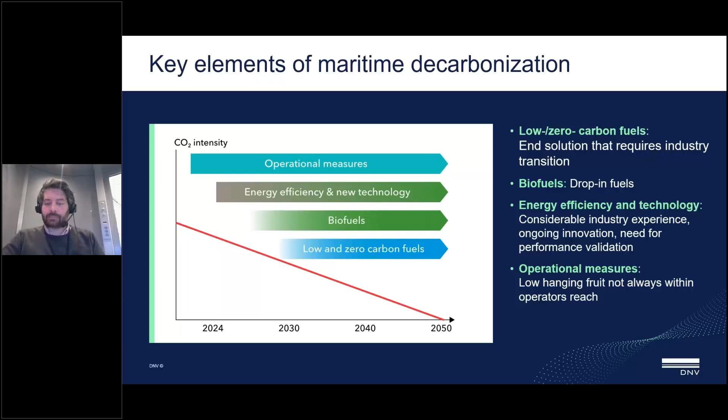So starting from the fuels, what we see here, if we start from the left-hand side with the pie charts, in the top left-hand side, we have the uptake of alternative fuels. In the existing fleet, more than 8% is able to burn some alternative fuel. We don't talk about fuel-ready vessels, we talk about fuel-capable vessels. And 8% is a lot, but not big enough. So it will become bigger in the future.

If you see at the bottom left, more than half of the existing order book is going to be capable to burn alternative fuels. So we expect the uptake and the theoretical demand to increase. So this is one aspect of the story.

If we take a second one, we go to the supply. We will have some part of the fleet being able to burn those fuels, but will they be available? On that front, we see a lot of activity, many projects being discussed and agreed. We have our AFI database that gives a good forecast on where this is heading. But the big challenge is how much of these fuels will be available for marine usage, both in terms of geographical availability and cost.

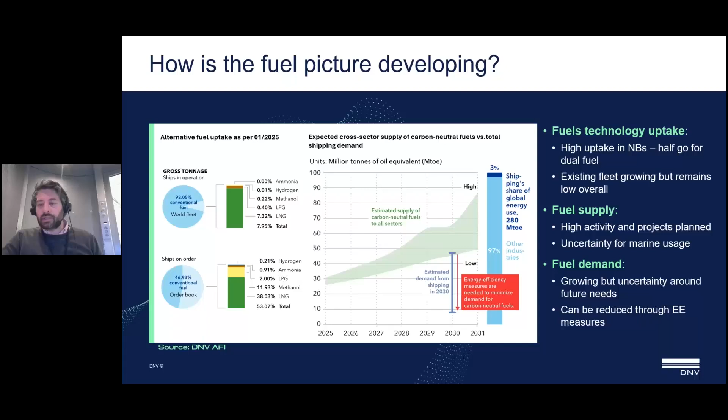The last aspect of this story is the actual fuel demand. So we have the theoretical capacity, the uptake, how much the fleet can burn. We have the supply, how much fuel is available, and then we have how much fuel is actually burned. This amount has been growing, but it remains quite uncertain for the future. The definite fact is that we can reduce that by utilizing energy efficiency measures, and this can help in the long term.

So this leads us to the question, why is energy efficiency important and how can it help? It can help in multiple ways. In the short term, it helps with reducing consumption, which relates to costs, both fuel costs and emission costs, since now we face CO2 taxes, and can help with compliance, either directly or indirectly. But this is the short term.

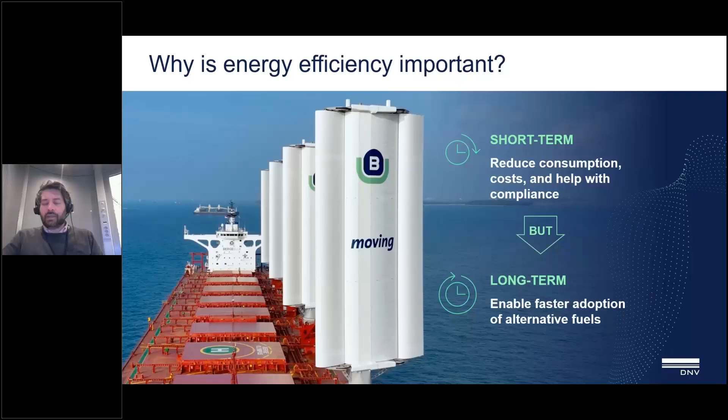If we take the long term and a more futuristic approach, we see that energy efficiency can be a great enabler of faster adoption of alternative fuels. How? We have two main arguments to substantiate that.

One comes from our maritime forecast studies, where we estimated a potential improvement through energy efficiency for the global fleet of 16%. This is quite a big number, but to bring some context into it, it is the same amount of emissions that would be emitted from the 2,500 largest ships of the global fleet, or 55,000 of the smallest ships, which are both quite big numbers and show how much potential energy efficiency has.

Of course, not the entirety of this 16% can be achieved, especially due to not having a good business case and techno-economic results. But the interesting part is that all of this 16% can, in theory and technically, be achieved with today's technology. So it's not something that requires new infrastructure, new technologies, or new on-land production facilities - we can utilize it today.

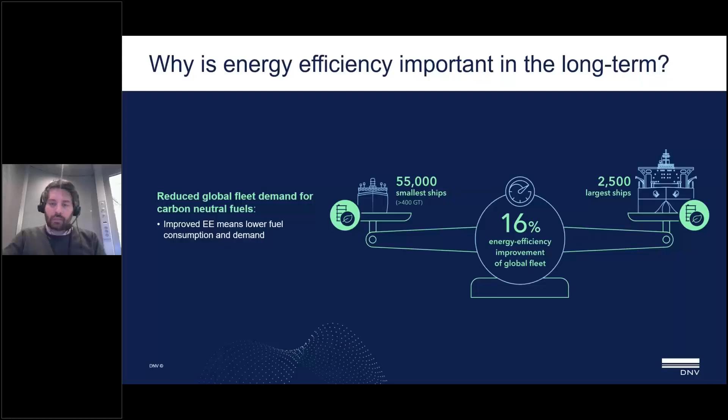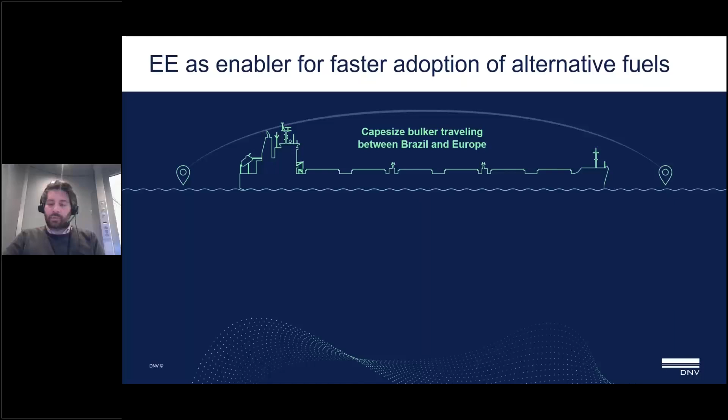But of course, it does not always make financial sense. But then we have another example. If we take this Cape-size bulk carrier traveling between Brazil and Europe, today she would burn 600 tons for this one voyage, paying...

$300,000. If we now take a theoretical increase of energy efficiency by 20%, that would mean that for each voyage we could save $60,000, which is quite a good payback and can provide positive business cases for quite a few vessels.

But in the future, we cannot necessarily predict the fuel of the future, but we can say with quite high confidence that it will be more expensive. In this reality, the savings from each trip multiply, and in this case, it could reach up to $300,000.

And this can make the business case quite different in both ways - both for adopting energy efficiency more easily, but also, if you adopt energy efficiency, you can then adopt the new fuels more easily because it will reduce the cost, which is one of the biggest challenges with new fuels. This amount does not even include the savings from emissions cost decreases through achieving compliance.

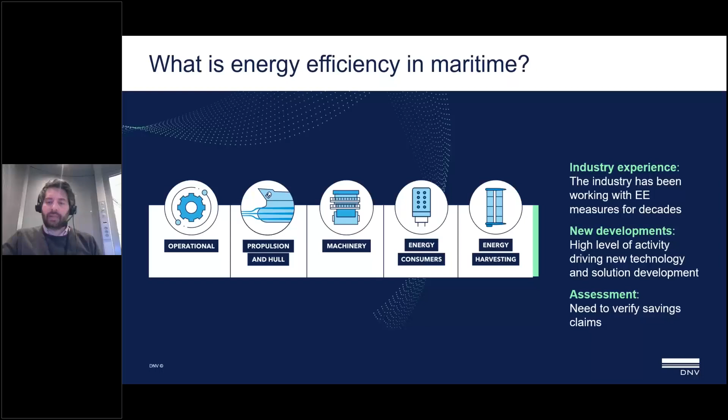This is also reflected in the uptake. We have some high-level statistics here on the uptake of the technologies. We shouldn't fixate on the numbers, since they're hard to estimate in any case, but I'd like to focus on the trends. The first key takeaway for me from this table is that you have a lot of greens and a lot of reds. So there are technologies and ship types with very low uptake of energy efficiency measures, which means they have a lot of potential.

Then you have other segments like container ships, for example, that have done a lot of retrofitting and installation on new buildings, and have high uptake. But even in the greenest parts, the percentages are quite low. This shows that as an industry we still have a lot of potential.

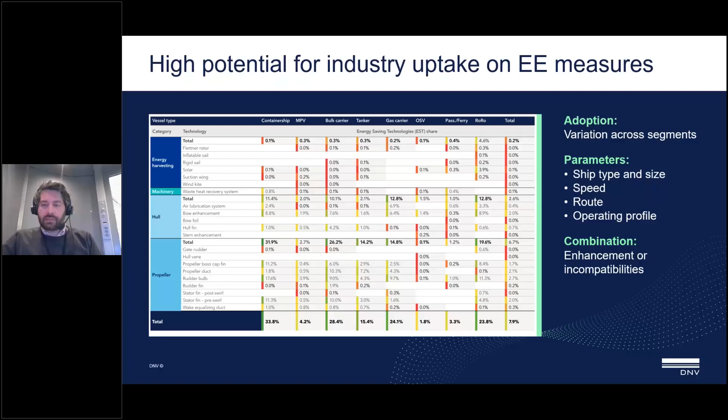But of course it doesn't always make sense to go for the retrofitting route. You need to assess on a case-by-case, vessel-specific basis, taking into account all the parameters, in order to assess the feasibility of the retrofit.

In this report we published, we monitored all the available technologies, more than 40 measures, and you can find a table with a high-level presentation of all the technologies, providing information on metrics including efficiency gains, costs, and implementation time.

Then information on the impact, on which schemes this technology can be used for, EEDI or only operational measures like CII or FuelEU, and then a very high-level applicability to ship types.

Of course this can vary significantly within one segment. You have various sizes of tankers, and even within the same size you have various operating conditions, but this provides a good overview of where you should focus.

Now, if you want to focus on one technology, in the report for each technology we have one or two pages that provide information on the main challenges, the main dimensions, class requirements, milestone projects, industry experience, and also a ribbon that lets you easily guide yourself through the suitability of this measure for specific vessels.

This ribbon covers the TRL, the technology readiness level of the measure, and at the bottom you have the ship type and vessel size suitability for each type, based on our experts' judgment, taking into account technical, operational, commercial, and techno-economic aspects.

Then you may get information on vessel age applicability. It may be that the older the vessel gets, the less promising this technology becomes, typically from a techno-economic point of view, and whether it's a good option to retrofit or only suitable for new building installation.

Then, which schemes does this have an impact on: EEXI, EEDI, CII, ETS, and FuelEU or GFI, with a disclaimer that we don't know for certain, but based on the latest drafts of how the GFI could look.

And in the last column you may find high-level information around CAPEX, efficiency gains, OPEX, and also implementation information. As I said, this is quite high level. For more details, please get in contact with us, our experts, and your local point of contact for more information on specific vessels and routes.

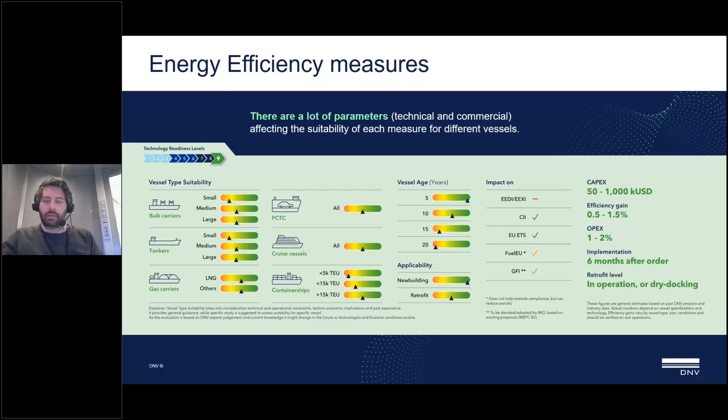Now trying to go through the main categories of the energy efficiency technology, we have propulsion and hull measures. We have 4 aspects that we judge each category: technology, regulatory acceptance, efficiency gains, and economics.

When it comes to technology, this category of measures is quite mature, however we see quite many new technologies being developed every month. Regulatory acceptance is quite high and relatively easy. They can provide efficiency gains across the whole spectrum from low to high. The higher you go, the bigger and more time-consuming installations you need, but also the higher the investment cost. And when it comes to economics, we typically have low returns on investment.

The 3 most popular measures in this category are propeller retrofit, typically mainly done for container ships, but it can provide quite a lot of savings. Low friction coating, I think that's one of the most popular solutions overall, and in the past year it has been boosted quite significantly. And propeller flow improvements that can be retrofitted quite easily—some of them don't even require dry dock.

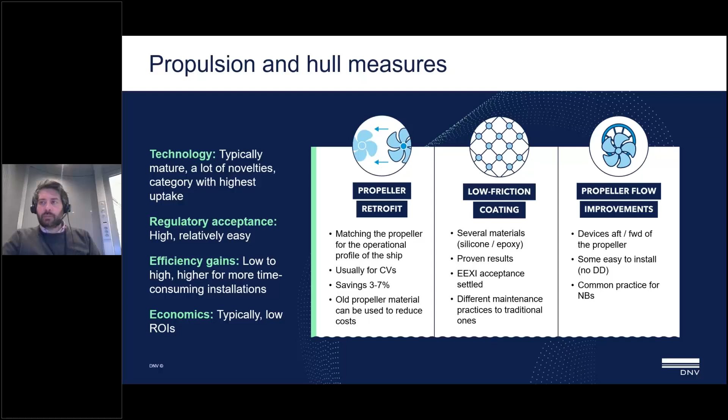Then we have machinery measures. They are quite mature. The interesting thing here is that we see old technologies that did not make sense for financial, techno-economical reasons—now they do make sense, so they come back. There is high regulatory acceptance, and the efficiency gains can be low to medium typically, which leads to higher ROIs. The most popular solutions are shaft generators, which have also become a standard in new buildings, waste heat recovery—both high temperature and ORC, though they can be a costly retrofit—and finally auxiliary engine economizers, a very common choice for new buildings.

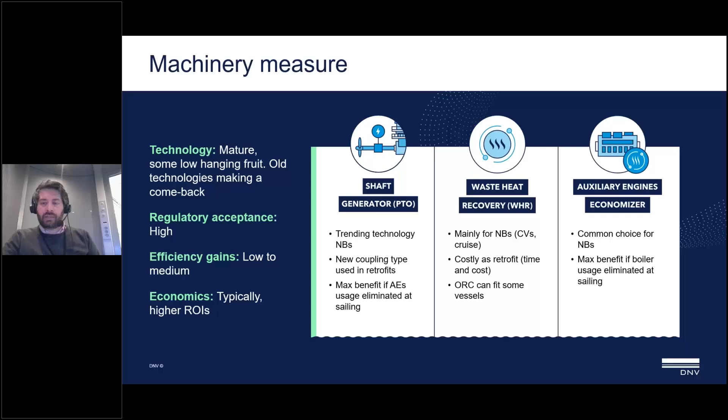Then we have the more exotic, new stuff: energy harvesting. These are quite novel technologies that need to be proven. Definitely when it comes to regulatory acceptance, especially wind-assisted propulsion,

they have this reward that FuelEU provides, the 5%, and there are discussions that IMO will add something similar, so it's quite good on the regulatory aspect. When it comes to efficiency gains, they are quite ship-specific and actually route-specific. Especially for wind, the gains and the business case of installing any type of WAPs is heavily connected with the weather profile of the route of the vessel. So automatically this excludes a large part of the fleet, but if it can be predicted for specific routes, then there are quite high gains that can be achieved. And definitely they are quite costly exercises, at least for now—the capex is quite high, but of course the more we move into a volume business, we expect the cost to reduce significantly.

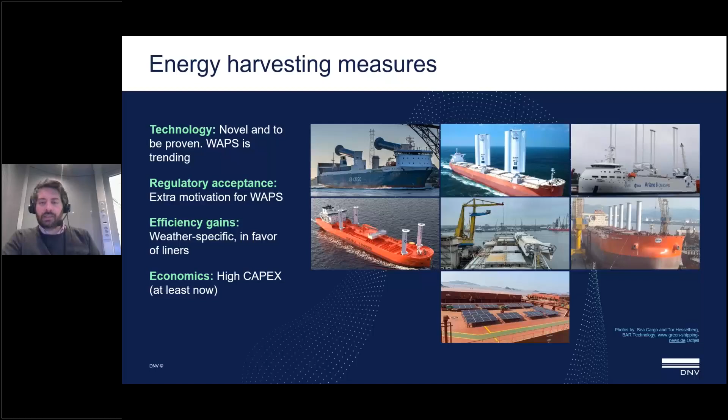Last but not least, we have the operational measures. They are mature, but the challenge here is that it's not always within the control of the operator, the owner, or the manager. They are de facto accepted by the regulations because they have an impact on actual consumption, and they can provide up to moderate efficiency gains. The most popular ones being discussed are just-in-time arrival, which also needs the cooperation of other stakeholders, hull cleaning, and autopilot.

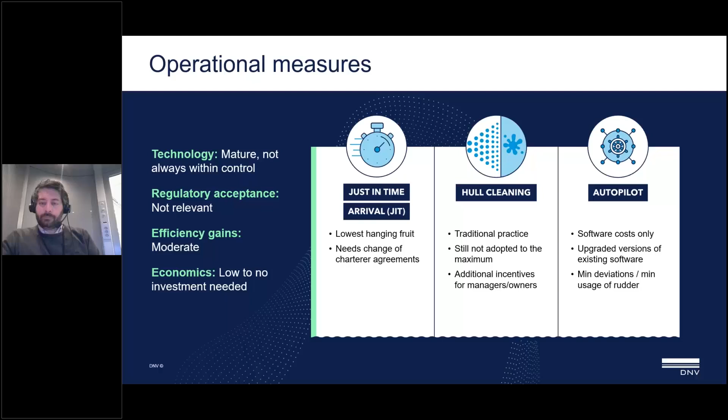So we have a few examples. If a vessel is about to install an ALS, air lubrication system, then of course there are synergies with a shaft generator—being able to produce the extra power needed with better efficiency creates a very good synergy. But on the other hand, this could limit the impact of the ALS if you have a dead weight increase, because it may affect the efficiency of the whole system.

And similarly, if you have high performance coating, then you will not get the savings of both, because inherently the ALS provides better anti-fouling capabilities.

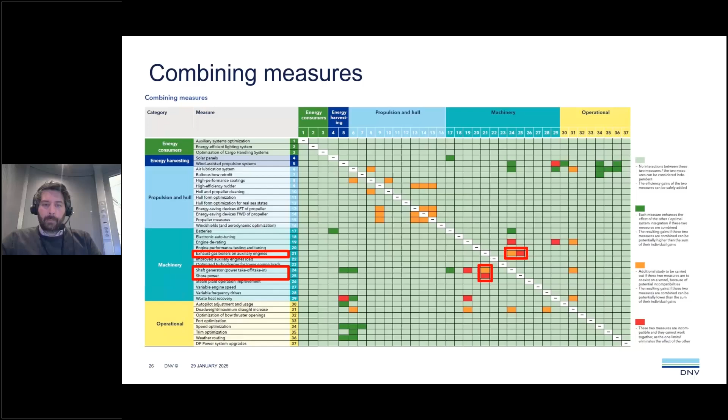So focusing on a few selected technologies now, we have energy efficiency lighting systems. They are quite an easy retrofit. It can be high cost for some vessels, but also high reward. For cargo vessels, it may not have that big of an impact, but for other ship types like cruise vessels, ROPAX and PCTCs, it can be quite rewarding and impactful.

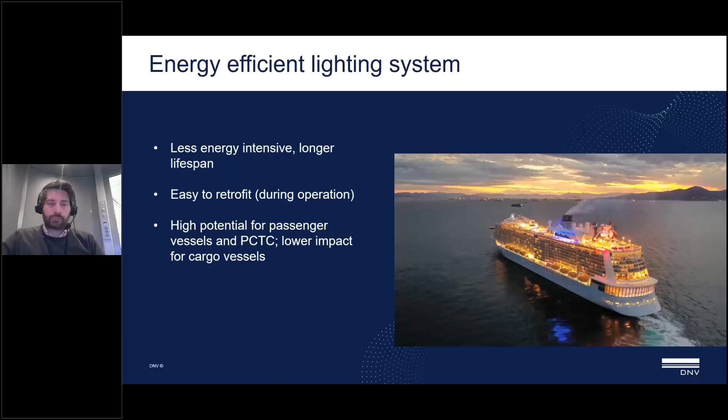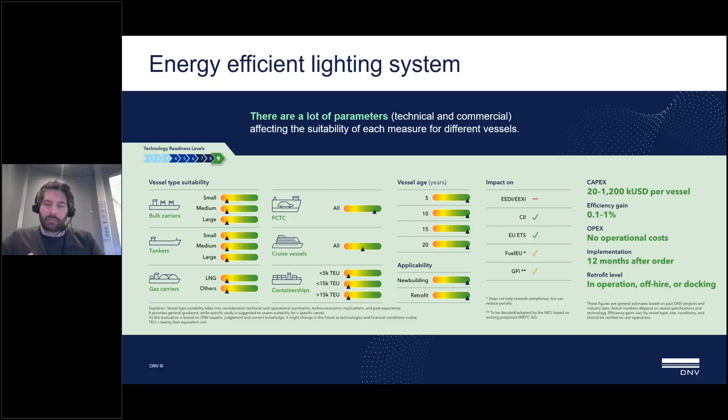And when it comes to the ribbon, which again you may find in the report, this is being reflected here as well. It's irrelevant to the age and can significantly help with CII and ETS. It's a small percentage, but it's quite easy to achieve.

Then we have VFDs, variable frequency drives. In a nutshell, they replace the standard drives with a dynamic power adjustment, so you don't work between 1 and 0, but you can work at the load that you need the motor to work, and this can provide quite significant savings. Where can it be applied?

There are quite a few systems on board the vessel that VFDs can be applied to. Most commonly, they're used for the engine room fans and the large compressors that may be found in the engine rooms, and cooling water pumps.

But then there are applications also for less common uses, for ballast pumps and steering gear pumps as well. There is a lot of experience from the industry. There have been many retrofit projects so far, and in new buildings, we can safely say that it is considered a standard.

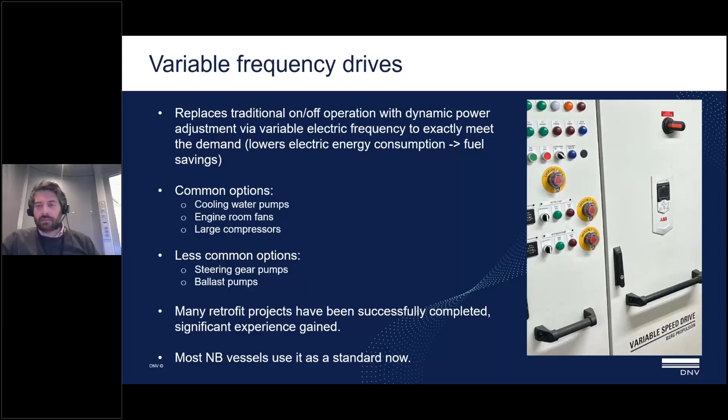And of course, this applies to all vessels and all ages. Again, this is a quite straightforward retrofit to do and does not even take that much time, but definitely it will require some time, either during the dry dock or sometimes even a port stay.

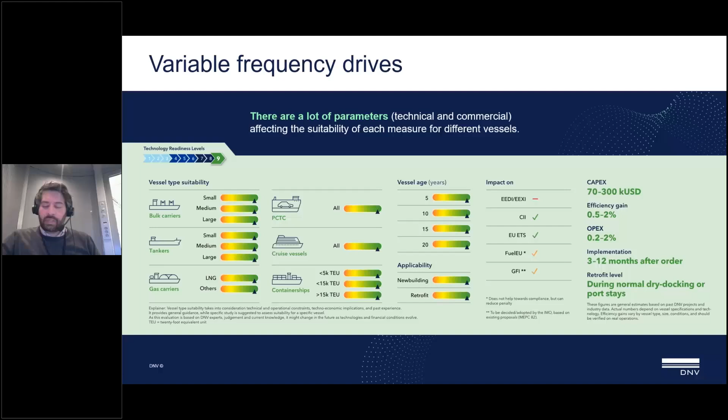It can definitely not be applied to all, but it can provide significant gains. Pyxis Ocean, the vessel that got a lot of media attention, that had the rigid sails, she was able to sail at 5.5 knots only on wind without main engine usage, which is quite interesting.

The challenge with WAPS is first of all to have a good weather profile. You need to know where the vessel will trade, and that this trade will have a good wind profile to be favorable for wind. In a nutshell, you cannot get many savings if there is no wind. So this needs to be studied.

On the other hand, FuelEU has provided a 5% reward. So just by having installed WAPS on board the vessel, a 5% compliance is already achieved, which is quite a big incentive, especially for vessels with high consumption and high activity in EU ports.

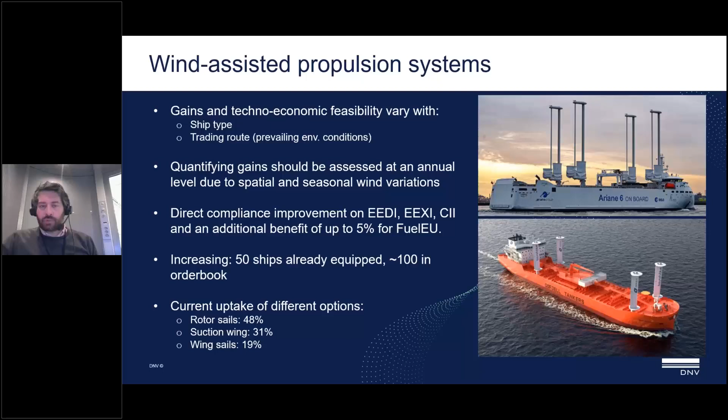And from our statistics, what we see is that almost half of the installations have to do with rotor sails. Then we have suction wing and wing sails. But of course, there are various technologies, and each one has pros and cons, and you need to study which one is best for your specific vessel.

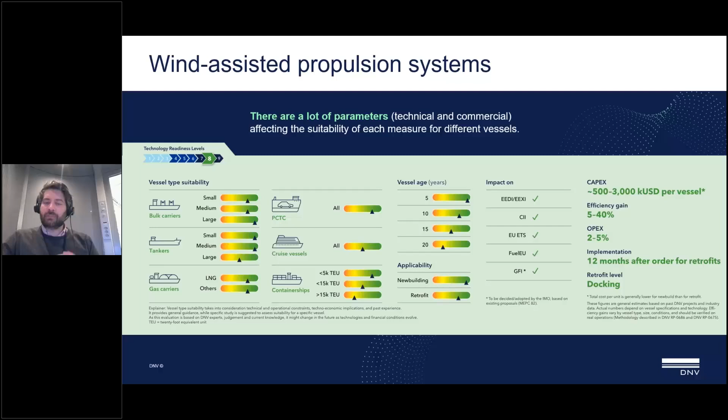And as we touched already, this is not a cheap exercise. It's quite costly, but of course the efficiency gains can potentially be quite high. But definitely there is a challenge to find a good positive business case for a big part of the fleet.

Then we have another big large investment solution, ALS, air lubrication systems. In a nutshell, it's reducing the hull friction by inducing bubbles under the hull.

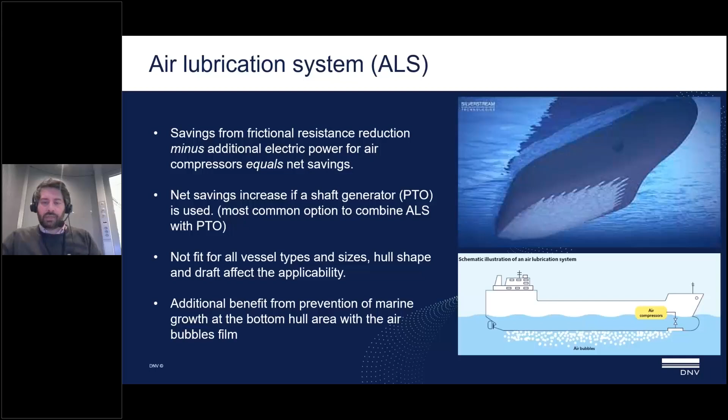As one may think, the savings are connected very much to the hull geometry and hull specifications, and it can provide savings, but for some vessels it may not provide any savings. There is an additional benefit that the existence of the bubbles may prevent marine growth on the hull. And this is the reason why if you have ALS and a very high performance coating, you need to make a study to see that one does not cancel out the savings of the other.

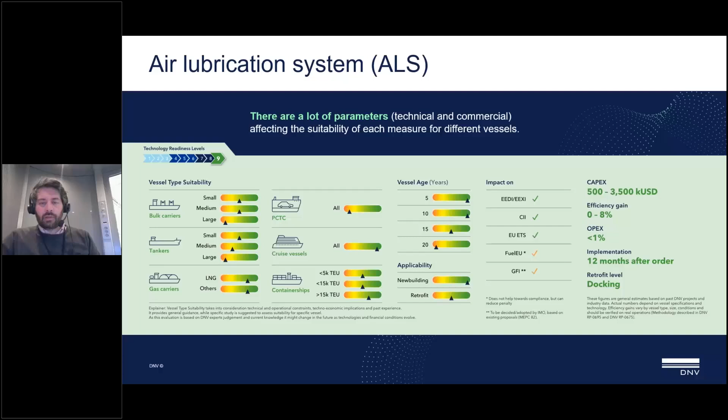The cost can be low to high depending on the technology and can be applied in quite some vessels, mainly depending on the hull geometry.

When it comes to exhaust gas boilers on auxiliary engines, this is quite a popular solution. It helps a lot, especially during operations at port and during anchorage. Sometimes it can even eliminate, but typically minimize, the usage of the auxiliary boiler, and this can have a significant impact on fuel consumption.

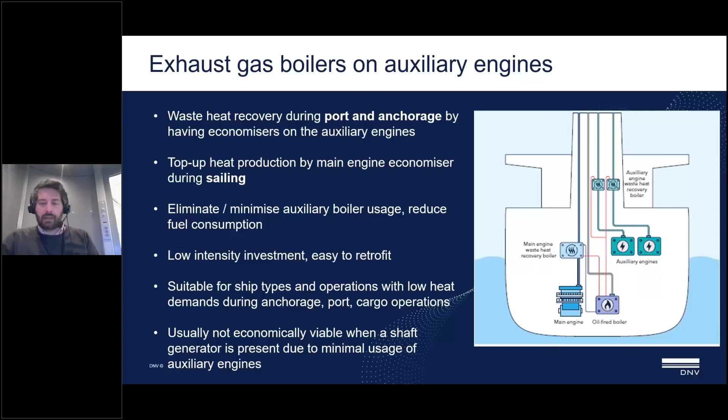But of course, now that we see the rise of shaft generators, we need to study if both of them make sense, because having a shaft generator would mean that you use the auxiliary engines less. So the overall techno-economic analysis needs to take into account that both technologies may cancel each other out. And it can be applied to most vessels.

Typically for newer vessels, it does not make sense to retrofit a very old vessel. It is possible technically, but not financially, and it can be done during normal dry dock.

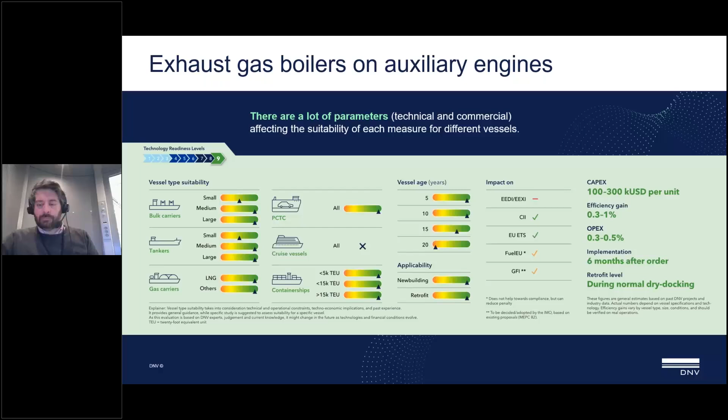Shaft generator is the other usual suspect. It's been becoming quite typical especially for new buildings. In a nutshell, it can provide electricity production at a much higher fuel efficiency compared to the auxiliary engines because of volume, and also it has a very good synergy with air lubrication for exactly the same reason.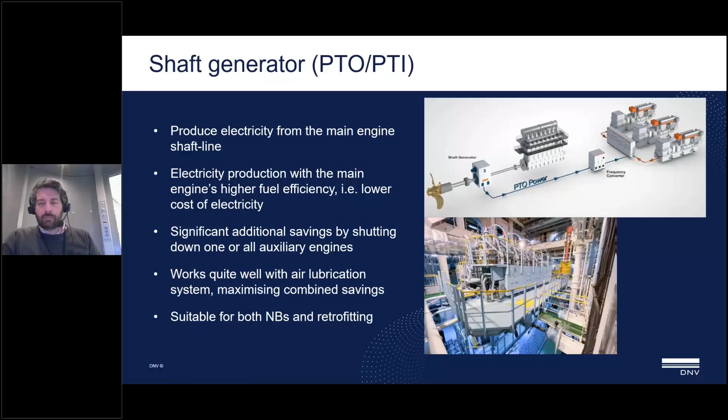Air lubrication requires an additional amount of power to operate, and producing this energy with much better efficiency can create a much better efficiency for the overall system. It applies to most ship types and sizes. Again, it can be retrofitted, but the older the vessel, the less it makes sense, and it can be installed and retrofitted during normal dry dock.

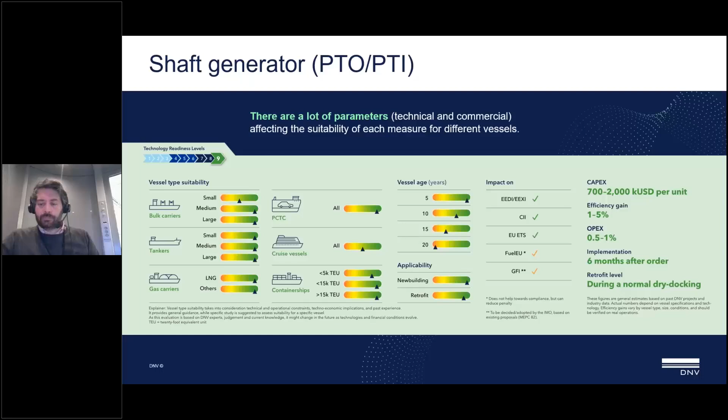Another quite interesting technology is shore power. It has received a lot of interest and traction because of some regional requirements. There is also an EU requirement that will demand container ships and cruise ships to have shore power usage. The penalty of not complying is quite high, and this has been pushing this technology a lot in the industry.

From our side, we did a study in our Maritime Forecast study last year. We estimated that 7% of global emissions are attributed to operations at port. And of course, this is very segment specific. We have segments like cruise vessels that can go up to 15%. And definitely we cannot replace all these emissions with shore power.

The energy produced emitting these emissions cannot be replaced by shore power. But even if we can achieve half of that, that's still quite a big achievement.

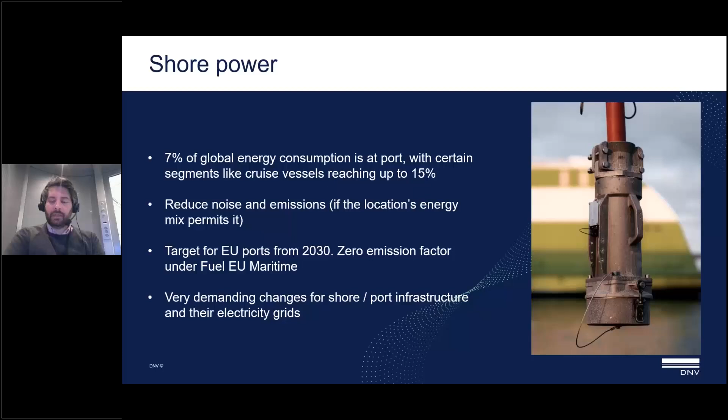It can be applied to many ship types. Now it makes more sense for cruise vessels and container ships. They have large port consumptions and port stays. It is irrelevant to the vessel age. It's not something that cannot be technically applied. Financially, it does not make that big sense.

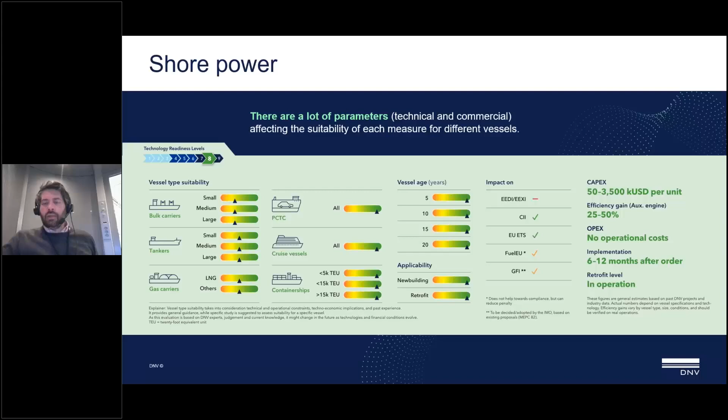But the biggest challenge when it comes to shore power has to do with the ports, because when it comes to the vessels, there are some challenges, mainly around standardization, but at the end this will be solved, and already we have vessels that can very safely utilize shore power. But currently not all ports are prepared to deliver this green shore power in terms of infrastructure, in terms of cabling, in terms of ensuring that they have access to green shore power. So in order for this to really take off, other stakeholders and especially ports need to step up their game.

Now in the report, for the sake of completeness, we have also information and a high-level overview of other decarbonization solutions that go beyond energy efficiency. Starting from low carbon and carbon neutral fuels, we already touched on that. They have quite high uptake on new buildings, currently being more than half of the order book. But then the main challenges lie around availability and price.

Similarly for biofuels, they are the most popular solution for FuelEU compliance. They are, in theory, the best decarbonization solution. You do minimal to no retrofit, you pay a premium and you are compliant, but as many things, it's too good to be true. And I need to quote a colleague saying that this could be quite a lazy solution.

Because you achieve short-term compliance, but you don't plan for the future. So our view always is that, yes, use biofuel to achieve compliance today, but as its availability may be challenging in the future, make sure that you plan ahead also for other solutions and you don't just rely on biofuels.

Then we have onboard carbon capture and fuel cells. They are quite promising technologies. Still, we need to do a lot of work in order to have mass production and be considered widely mature technologies. And then we have nuclear, which is definitely far from being a mature technology, but it is most probably going to play a big part of the long-term energy mix.

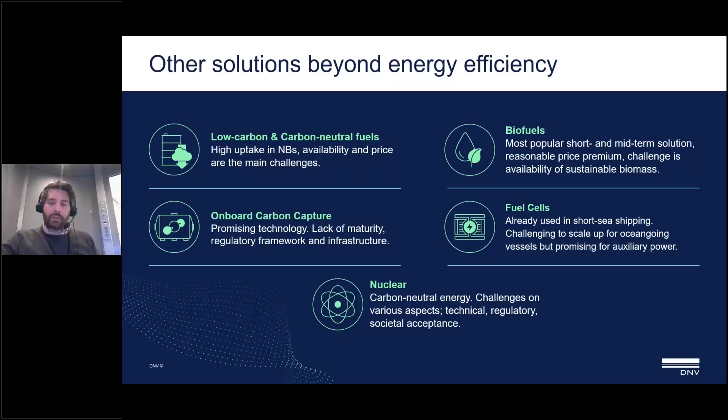It may be that we don't see onboard usage in the next years, but definitely it can be used for floating energy production or even producing the green fuels that the industry needs. From our side as DNV, we have been quite active on nuclear propulsion. We don't promote or demote any technology, but we need to be ready to assess these technologies from the class perspective.

So that's about the technology. Now let's see how to bring this into context. First of all, we saw that the technology is there. There is a lot of knowledge in the industry, but we don't have that much uptake.

As we can interpret partially from the poll outcome, there is a lot of uncertainty. Although we may have theoretical understanding of how the technology works, we still do not have big confidence on the savings gains as an industry. And of course, it makes sense since we have a lot of new technologies.

This is why we say that we need new verification standards by the industry, and we have been quite active on that front. We have released a recommended practice on technical ship performance, the VTI, the Vessel Technical Index. We have also been providing to the open hearing recommended practices on ALS and WAPS.

As general guidance, we see three pillars that we need to improve as an industry. First of all, data. This is the quintessential part of this equation. We need to have good quality data, and this can only be achieved through standardization of the data acquisition processes.

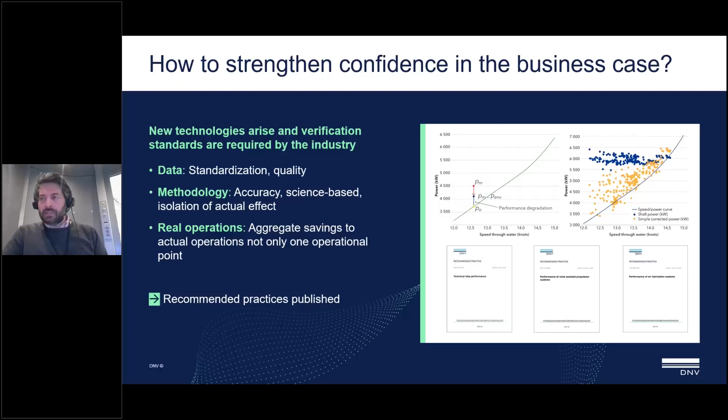And last but not least, we need to make sure that we aggregate these savings and results to the actual operation of the vessel. It's very often the case that we find savings in one design spot that mainly is not even the most frequent operational point of the vessel.

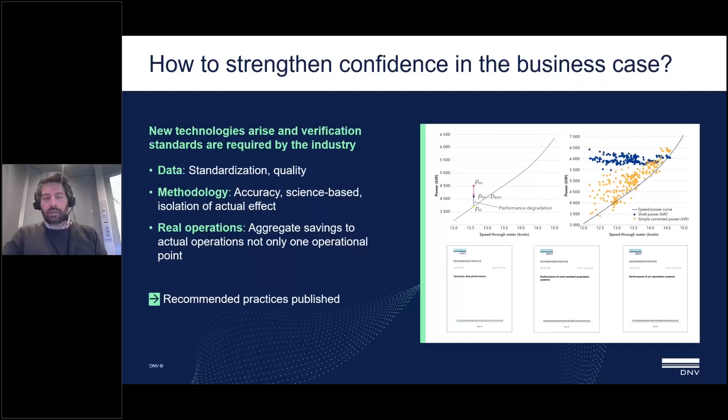So you may have 20% savings in one combination of speed, load, and laden condition, and then the vessel sails only 3% of her time at that condition, with the rest at 3 to 5. So we need to make sure that we annualize the savings to the actual operating profile of the vessel.

And then it's not only a matter of having knowledge on the technology, but also planning. What we suggest, and what we have been supporting the industry with, is to plan ahead: have a decarbonization plan, make sure you have assessed the fleet and provided a list of what technologies have potential for each fleet, and then have a very solid implementation plan.

We need to stress this last part because we very frequently see companies invest and develop a plan on how to implement energy efficiency on a fleet-wide approach, but then when it comes to actually implementing, many parameters affect it and it's not materialized—people leaving without a succession plan, not having proper monitoring processes or KPIs. This is something we always stress needs to be in line when you have a decarbonization plan.

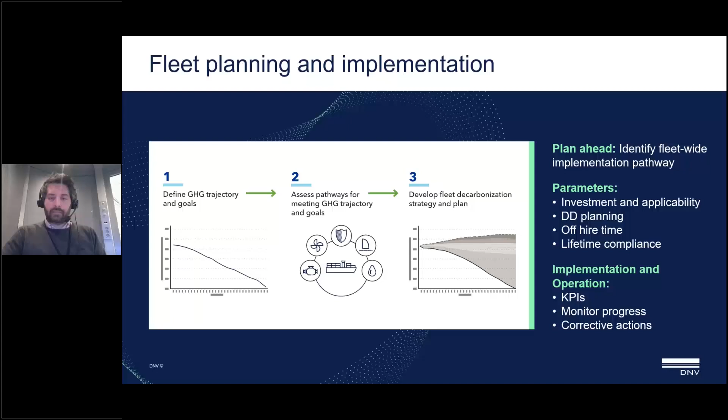So at this point, before closing, I will pass it over again to Simon for our second and last poll of this webinar.

Thanks. So once again, we'd like to hear your take on some of the measures we've been discussing today, and which of those measures you think are most relevant for you to invest in. We've got operational measures like speed optimization, increasing the draft, or using weather routing technology; measures involving propulsion and hull, propellers, or ducting, coating, air lubrication systems, or a change to the shape of the bow; and measures around machinery, the engine in particular, waste heat recovery, shaft generators, something around energy harvesting.

We've got sort of wind there—I guess solar panels might also be included in that option. And then finally, energy consumers, cargo handling options, and others of that nature. So we'll give you a little bit of time to offer your thoughts on the different types of measures.

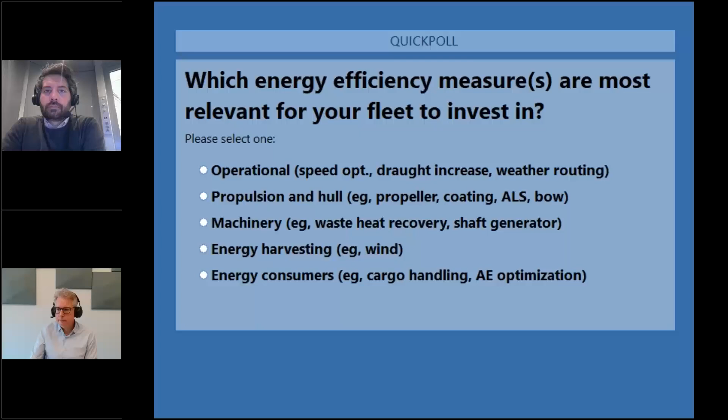It's interesting, I think we have a quite clear image with 40% voted. Propulsion and hull, and operational measures are on top. It makes sense—propulsion, hull, and machinery are the most frequently used, the most traditional technologies where the industry has a lot of experience, and especially comparing machinery to propulsion and hull, the latter is much easier and more cost-effective to install.

Interestingly, operational is on top, which makes sense, especially when it comes to draft increase and weather routing—I think these are quite no-brainers for many segments. And I think it's quite promising that we see 9% voting for energy harvesting and wind, which is quite an exotic technology, and we expect to see more and more from it.

Great. Indeed. Okay.

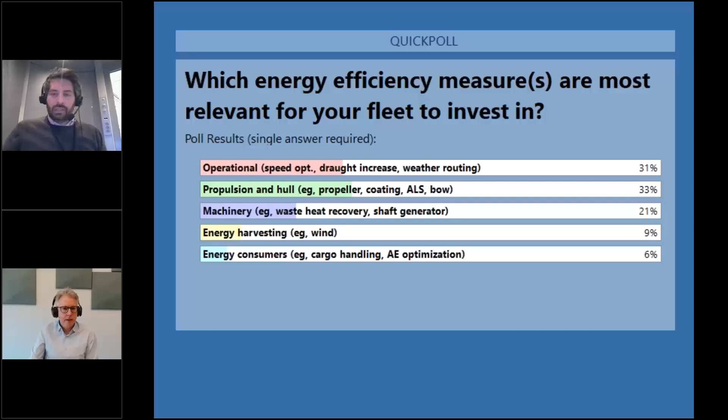So closing, before our Q&A session, just to recap, we have been discussing a lot about energy efficiency, and we expect this will play a significant role. But starting from talking about not energy efficiency, from this study and the various studies we have been doing and this publication, we have identified some recommendations for the industry. We start by always saying you should always investigate new fuels for new buildings. It may be the case that it does not make sense for some ship types and sizes. It definitely does not make sense, but...

With the targets being set and quite close, we definitely should investigate all technologies and possibilities. We should not rely on bias. We should not close the doors to technologies or fuels, and we should not aim for technologies or fuels without studying them. This is why we say, even if for your ship type and size it does not make sense to go for new fuels, still make the investigation. This can provide you the facts, so you will not just have a biased opinion, but a fact-based decision on whether to go for new fuels today or later, based on this and that.

Beyond that, when it comes to energy efficiency, the first step is to assess the status of the vessel and the fleet. This is something we see more and more companies doing. Of course, there are companies with large departments that have been actively doing this for years, but now we see an industry-wide focus on it.

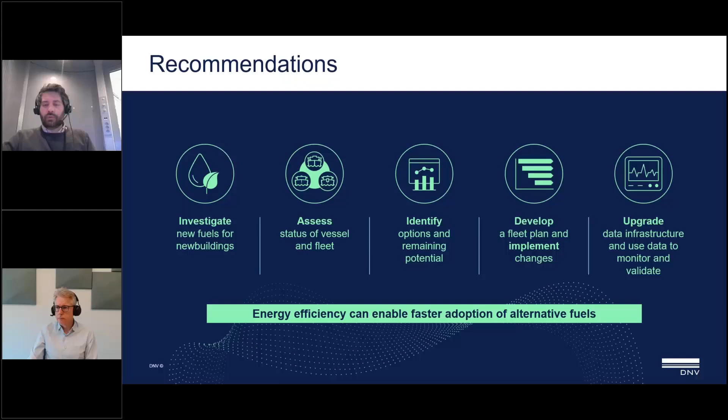I think we reached the end of our presentation, so we can safely go into the Q&A session. I think we can too.

Let's get into that right away because we have had a lot of questions, and it's always great to see what we can feed back. There's a lot of material online, including on our Decarbonization Hub, and the report you can download from the DNV website. So head there if you're interested in following up on any of these topics in a little more detail.

Let's maybe start off with a very basic question around how we, I think maybe let's not go into too much detail, but what we've based the cost calculations on for some of the measures and the numbers in the report. If we could maybe have just a little detail on that.

Yeah, that's a very good question, and it's not easy to say, but the main part of all this information comes from our internal database. We have been doing projects on energy efficiency for quite a few years now, for decades, and we have gathered all this information in one database. So mainly this information comes from projects that DNV has directly been involved in, and not just open literature that may not be verified.